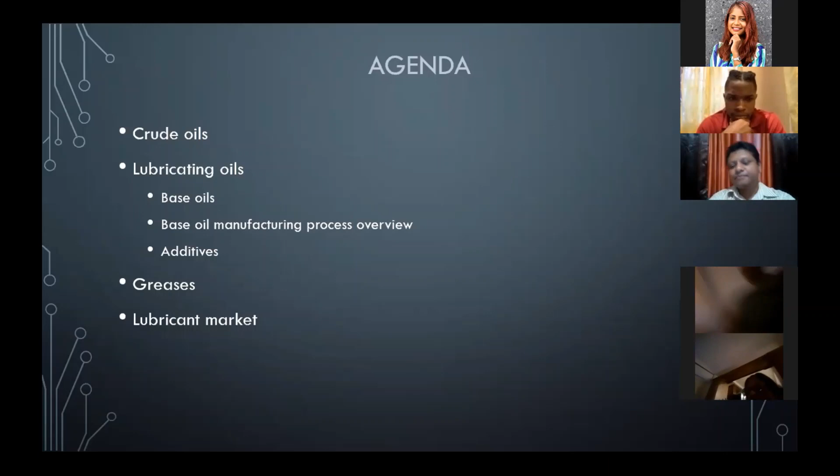So the agenda for today, you've seen the screen change. Crude oils would be crude oils. I'll talk about lubricating oils and its components, how the components are manufactured, specifically the base oil part of it. I'll talk a little bit about greases, application, specifications, and the lubricant market itself, just to give an idea and bring it all together in dollars and cents, which is what we are all about at the end of the day.

So lubricating oils. Normally when people talk about lubricating oils, they mean anything—it could be anything from baby oil to hydraulic oil to turbine oil to oil you could put on your dog. That's a general term for most people who are not familiar with the different types of oil. So it's really a generic term, and it really comprises base oil.

So there are two parts: base oils and additives. The most common lubricating oils are mineral type oils. So mineral type oils are one type of oil. We also have synthetic oils, and plant-based or bio-based oils—you would have heard about soya oil and rapeseed oil being used in equipment or some hydraulic equipment. This presentation, however, will focus on the petroleum-based or mineral-based lubricating oils.

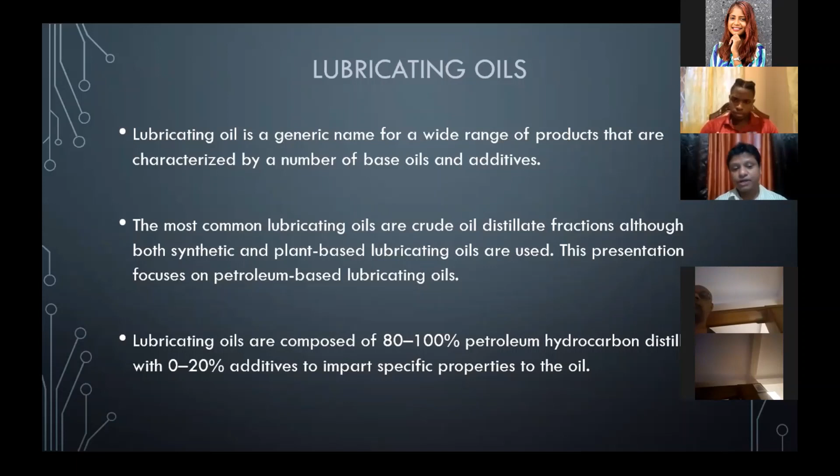These lubricating oils comprise anywhere from about 80% to 100% base oils, in different proportions depending on the type of oil. You have plain process oils, which are 100% base oils, and things like hydraulic oils, which have just about 0.5% additives. Then you have engine oils, which are anywhere from about 15 to 20% additives, and automatic transmission oils, which contain a lot more additives because they're very complex. So you have very simple lubricating oils going to complex lubricating oils.

So a little bit about the manufacture. Crude oils come from different parts of the world, and they have different characteristics and properties, and they classify differently. Basically, you have the paraffinic type, and you have the naphthenic type, or the aromatic type base oils, named after the predominant type of molecules.

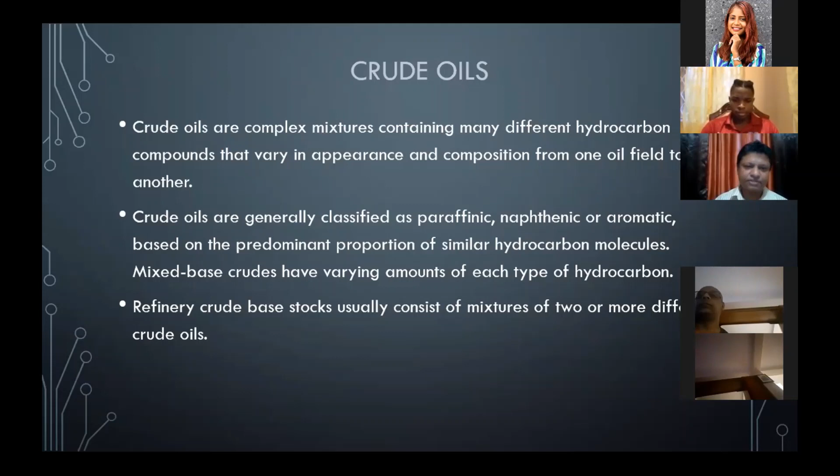So refinery crude base stock usually consists of a mixture of both, depending on the type of base oil they want. Most base oils used are paraffinic type, so refiners tend to purchase more paraffinic type crudes, or they have to mix the crude. Remember, they don't just manufacture lubricating oils, they manufacture fuels, which is the bread and butter of any refinery. The lubricating oils are an after step.

So with respect to base oils, there are a number of different base oils, and of course different qualities, different types, different manufacturers even of the same type, and they give different properties. The properties depend on the properties of the crude, especially for group 1 base oils, and a little less dependent as you start to hydrotreat and hydrocrack the base oils.

Just to give an overview, this is the API, the American Petroleum Institute publication 1509. It groups base oils because, as I said, it became very complex. For group 1 base oils, the saturates are less than 90%, the sulfur weight percent is more than 0.03%, and the viscosity index is anywhere from 80 to 119. The process uses solvent refined processes.

Group 2 base oils are more than 90% saturates, have less than 0.03% sulfur, and a viscosity index similar to group 1, so 80 to 119, and they are hydroprocessed, but lightly. Group 3 base oils are more than 90% saturates, less than 0.03% sulfur, however the viscosity index is more than 120.

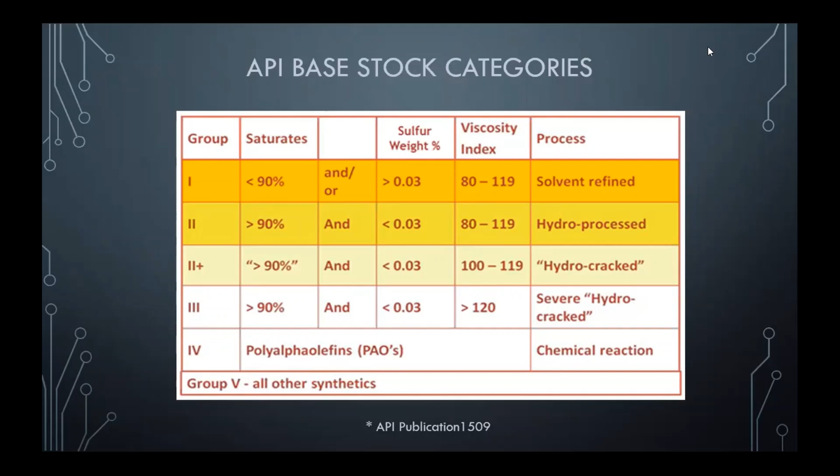Just to quickly give you an idea, we know what saturates and sulfur are. The viscosity index is the rate of change of viscosity of lubricating oils with temperature. So the higher the viscosity index, the less the viscosity changes with temperature, giving you a more steady viscosity throughout the temperature range in which the equipment works. That's the more useful thing to have, obviously, and it's all dependent on application.

To produce group 3 base oils requires severe hydrocracking. There's also a group 2+ category, for medium hydrocracked lubricants, so the quality is somewhere between group 2 and group 3.

Group 4 base oils are polyalpha olefins, created by a chemical reaction. Group 1 to 3 are based on mineral oil, produced from crudes, which is the focus of this seminar. Group 5 base oils are all the other synthetics, so you could have polyol esters, polyalkylene glycols, silicone oils - all those other things fall into that category.

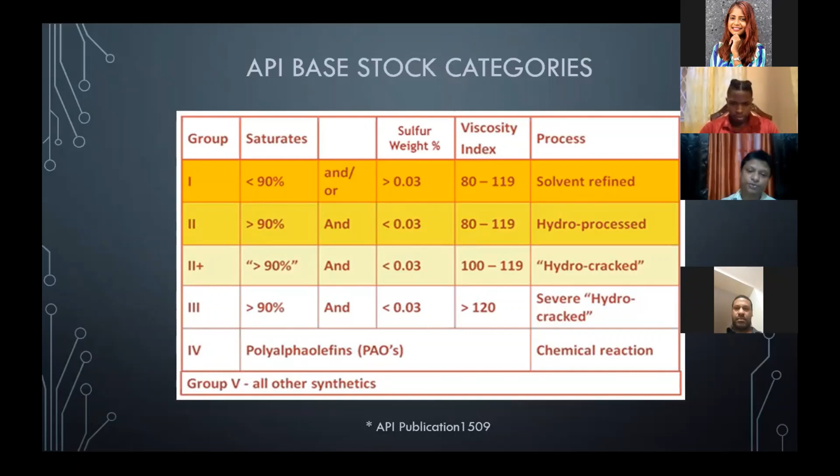So group 1, 2, and 3 base oils basically reflect the evolution of refining technology over the past 70 or 80 years. Group 4 base oils have existed for more than 50 years. They are pure chemicals created in a chemical plant. Group 1 to 3 base oils are produced using distillation and refining of crudes, whereas group 4 use components from the crudes and put them together in a chemical reaction to form the PAO molecules. So PAOs fall into a category of synthetic.

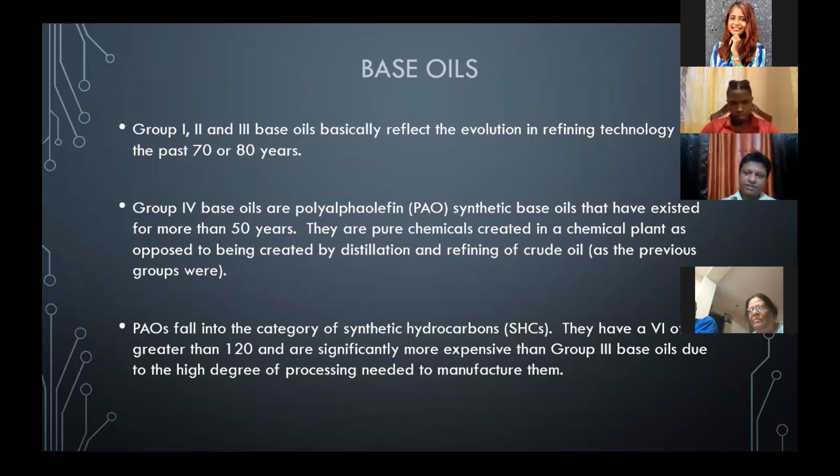They call them synthetic hydrocarbons, and they have a viscosity index greater than 120. They are, of course, a lot more expensive than group 3 base oils to produce because it needs a lot more processing to manufacture them.

So a little bit about the base oil quality.

More than 80% of any lubricating oil is base oil, so the base oil has a great influence on the lubricating oil. Some of the things affected are viscometrics, viscosity grades - lighter lubricating oils need lighter base oils, and heavier viscosities need heavier base oils.

Appearance is important - color, cleanliness, clarity. Take sewing machine oil, for instance, in industrial sewing machines where lubricating oils are used in the equipment. If there's a spill, the oil can get on clothes and discolor them, causing loss of product. So those oils tend to be very clear and light so they don't soil the clothes excessively. Clarity also matters for some applications where you need the lubricant to be clear enough to see through.

Volatility plays a part, volatility and safety. This is the property of the oil where, especially when heated, the lighter ends come off because of different molecule sizes. This affects your flash point and things like your distillation, so you might have more of the heavy ends remaining. If your lighter ends go off, you end up with a thicker base oil or lubricating oil, and that changes your viscosity, which can damage the equipment.

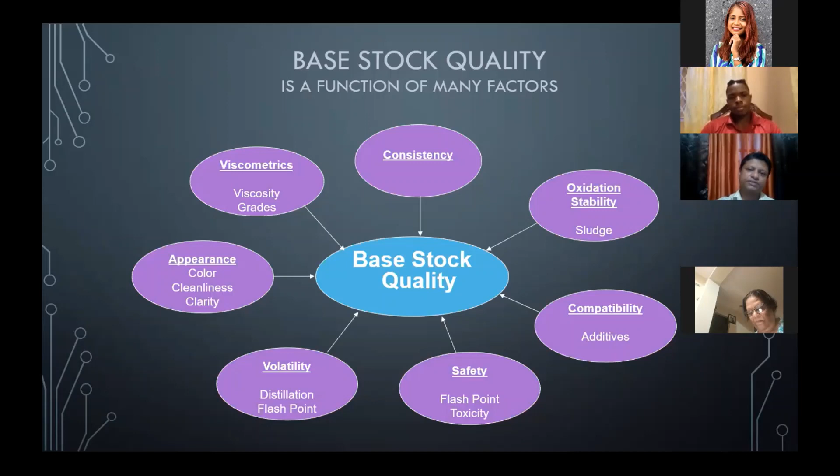Any questions so far? Anybody awake? Everybody awake so far? Yes, we are awake. Okay, excellent. Feel free to ask any questions if I'm going a little bit fast. You have any questions so far, though? Nope. Take that as a no. We have a question.

Synthetic oil or bio oils - will they replace extracted oil in the near future?

Good question, I'll talk about that a little bit later on. Let me just finish this, and if I forget when I come to the end, remind me, because I have a part addressing bio-based oils near the end. But just to give a general answer - not in the immediate future, because bio-based oils don't have a lot of oxidation stability, so they tend to oxidize faster. You find them more used in hydraulic type equipment where the temperature doesn't rise above 40 degrees Celsius, not in engine oils at hotter temperatures or turbine oils. And of course you always have the same argument as with biofuels - it's either food or fuel, because you use food to make the alcohols which you burn as fuel. So there's always that little argument there. But good question.

The manufacture of Group 1 base oil. Just to give a little overview, you preheat the crude oil and then send it through the fractionating column. At the top you have the gases - natural gas, propanes, butanes, which are the LPG. Then you have some gasoline types or naphtha types coming off. Then you have the different streams - kerosene and diesels, or the streams used to make kerosene, diesel, and of course fuel oils. This is very simple, very simplistic.

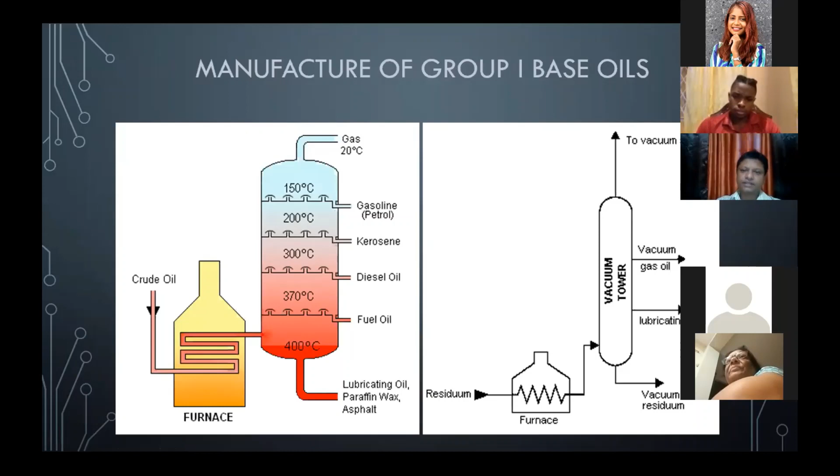So in a nutshell, this is basically the group 1 base oil manufacture. For group 1 base oils you have solvent refining, so the separation processes are solvent based. The solvents remove the aromatics and the solvents remove the waxes, and it may include a light hydrofinishing at the end, and that's basically how you produce group 1 base oils.

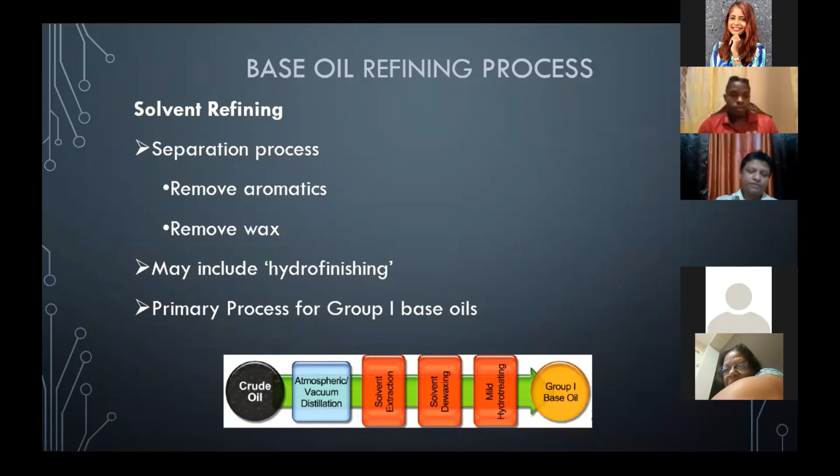And of course, these were the first types of base oils to be used.

The hydroprocessed route is for group 2 and group 3 base oils, and the difference between group 2 and group 3 is the severity of the hydrocracking or the hydrotreating. This is where you have molecular conversion - hydrocracking, catalytic dewaxing, and hydroisomerization, all things you can find on the internet. This produces the group 2 and group 3 base oils.

The difference here is, basically what you do is take a group 1 base oil and improve on it to form the group 2 and group 3 base oils.

To give an idea of how the market works, when there was a switch - there were a lot more group 1 base oil plants around the world, and we got a lot of supplies from America. Our major suppliers from America, with their emission controls, the older plants were group 1 plants and the newer plants were group 2 plants.

Somewhere around 2007, they had a switch in the market, and it was an odd thing where group 2 base oils were actually cheaper, better quality, and more expensive to produce, but they were actually cheaper in the market than group 1 base oils. It was based on demand, because all the manufacturers were using group 1 base oils at the time.

All the additives they had were designed to use with group 1 base oils, so they needed to switch. For about a period of a year, group 1 base oils, which were lower quality, were actually selling more expensive than group 2 base oil.

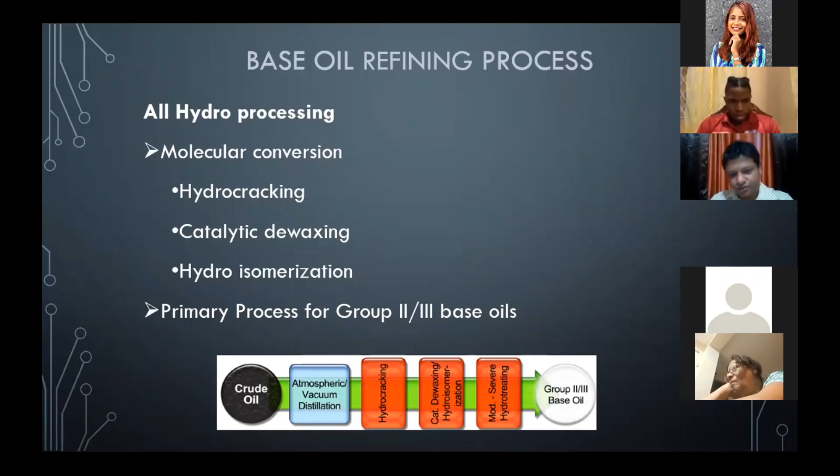So for the same viscosity oil - and I'll share my experience at NP of how much people pay attention to color even in the industry - when we switched from group 1 to group 2 base oils, when we were blending the heavier viscosity oils, you have lighter oils like an ISO grade hydraulic 32 or a gear oil 32, 46, or 68, and then higher gear oil viscosities like the 460 and even the 100 or 150s.

So the group 2 base oils have a lot better, and the group 3 base oils have a lot better oxidation stability because of the severe hydrocracking. It would have knocked out or broken up the naphthenic type molecules or the aromatics and created more paraffinic type molecules, which are more oxidatively stable and can be used at higher temperatures for longer periods of time.

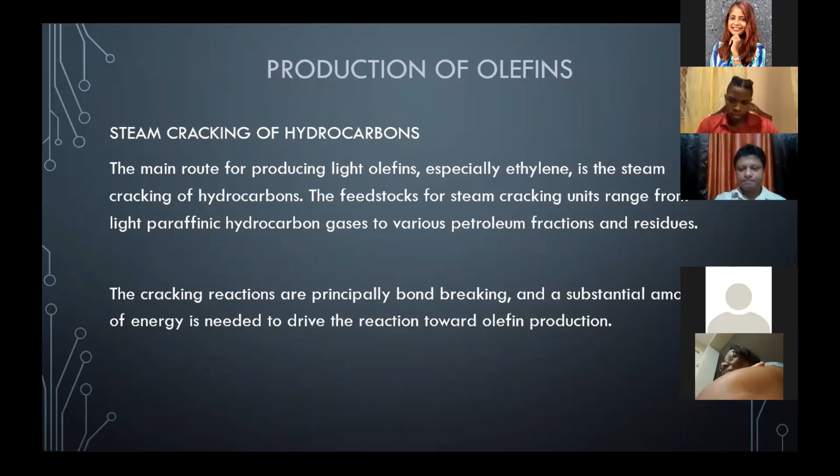The main route for producing light olefins is steam cracking of hydrocarbons. The feedstock comes from the refineries, so crudes and light ends, and it also comes from the natural gas field. So the raw materials for polyalpha olefins really come from the refinery - ethanes, propanes, butanes, naphthas (similar to gasolines), and gas oils (like diesels). That's basically what determines how heavy or large the molecules are.

You may have heard an ad where a particular oil company was advertising that they were using natural gas to produce their lubricating oils. This is the natural gas process they were talking about, to produce polyalpha olefins from natural gas feed. Obviously this is very energy intensive and expensive to make, so even though they advertise it, it's not a high quantity, and it's not manufactured in large quantities anyway.

So what they do is mix some of this into the lubricating oil and continue using the group 2s and group 3 base oils. It's not totally that, but once you understand the process - basically you have the different crackers, the production units where you put the molecule chains back together. This product here is not the lubricant; this product is the base oil, the polyalpha olefin.

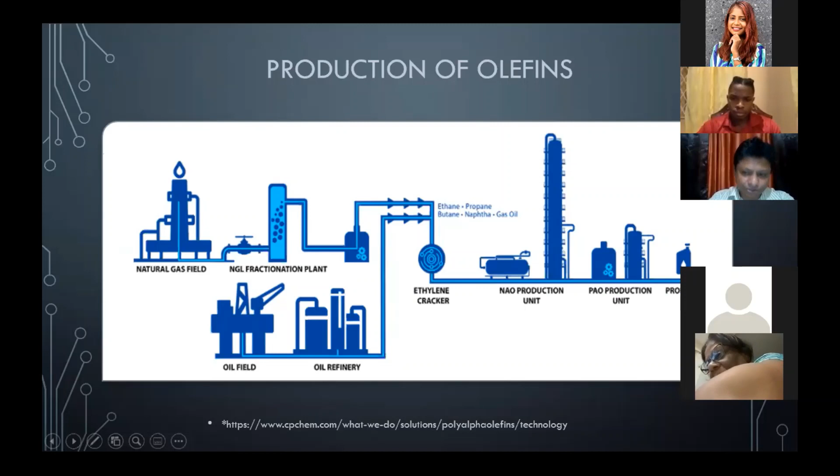Why I included this slide is so that when you have a manufacturing plant, it's like not putting all your eggs in one basket. If you have more than one market for your product, it mitigates your risk - if there's a downturn in the industry you're supplying to, it doesn't affect your business as much. It's like when you invest in the stock market, you split your portfolio into some low risk, some medium risk, some high risk, so depending on how things go, you hedge your bets.

So the predominant use of polyalpha olefins is as synthetic base stocks, and in addition they make surfactants, which are used for making aqueous detergent formulations.

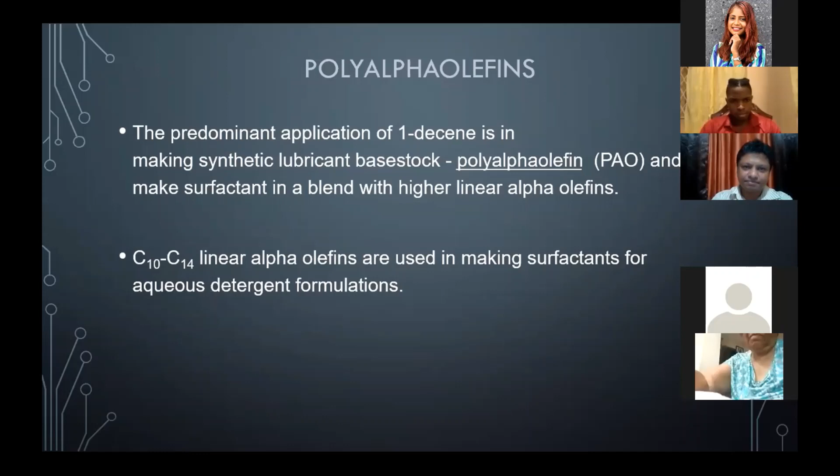A little bit of history of the PAOs - I included this slide because, since you are university students, I wanted to show that everything would have started with a small process moving forward, starting with experimentation. You tend to hear most times that you need to go to school, get a job, get a good job, then retire. But more and more now we're realizing it's like go to school, maybe start a business and take it from there.

Just to give an idea, the technology you see now really began years and years ago. PAOs were originally developed in 1930, and the first commercial use in engine oils was in the 1970s.

It's made from ethylene gas, which is crude oil or natural gas dependent. It has a higher temperature resistance than mineral type oils. Polyalpha olefins can be used up to approximately 160 degrees Celsius continuous service, and intermittently different parts of the unit could go up to 270 degrees Celsius. To give you an idea, the engine in your vehicle typically runs at a little less than 100 degrees Celsius, so 160 degrees Celsius is a pretty high temperature.

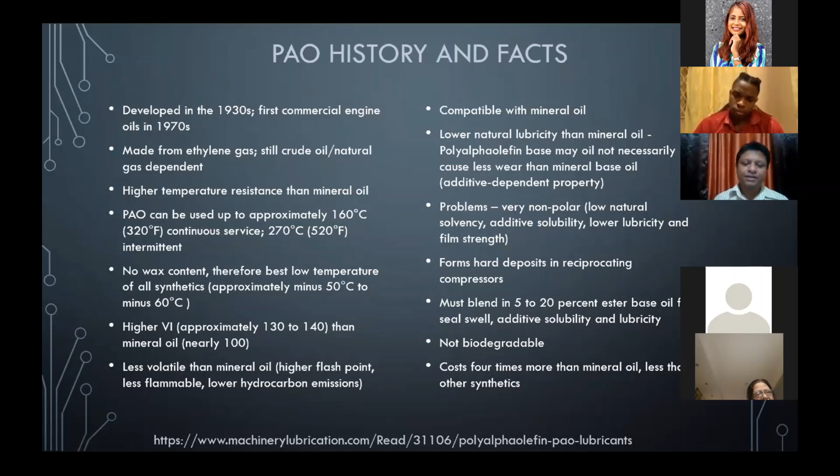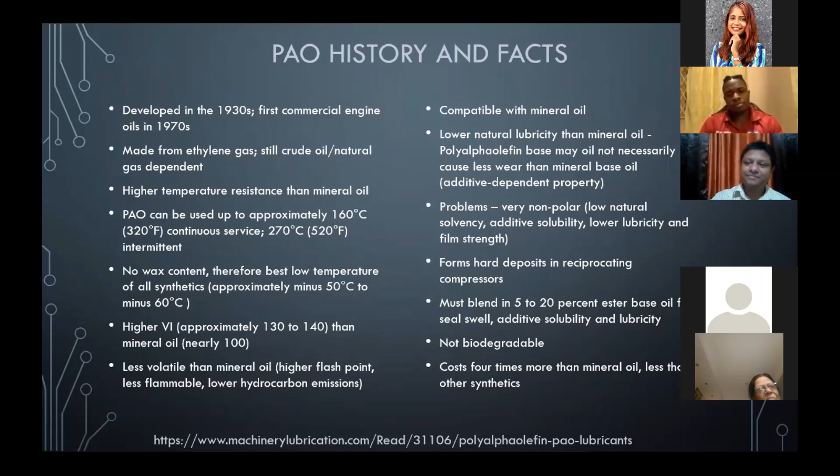So it took a while for the Europeans to change, but eventually everybody kind of switched to the group 3 base oils, because for the average user, using a PAO or using a group 3, I can't tell the difference, right, once I follow the oil change intervals and that kind of thing.

Any questions so far? Because that was base oils. So I have a question. You mentioned that it's not recommended to do an engine flush, right? Is it that the engine flush gets rid of the residual oil and that could cause a problem with your gears, or?

A good question. The reason why we don't recommend engine flushes is because the engine is complex equipment. You have high pressures, you have metals rubbing against metals. Even the pistons - sometimes you have metal to metal contact because the pistons go from top dead center to bottom dead center, right? So the pistons move like this.

Now to create the hydrodynamic wedge, you have the rings, and the rings move, because they're free to move between the piston and the cylinder. So it needs motion. It's similar to hydroplaning on the highway. If you drive slow enough, your tire would be in contact with the pitch. However, if you go fast enough, you'll get hydroplaning, where you get the hydrodynamic wedge between the road and the rubber, and so the road and the rubber never meet. That's the hydrodynamic lubrication.

So when this piston is moving top to bottom, at the middle you have a lot of motion, but when it reaches the top, it has to stop and come back down, so the velocity reaches zero. So you actually have metal to metal contact. And you have your bearings - remember, your bearings need a certain viscosity.

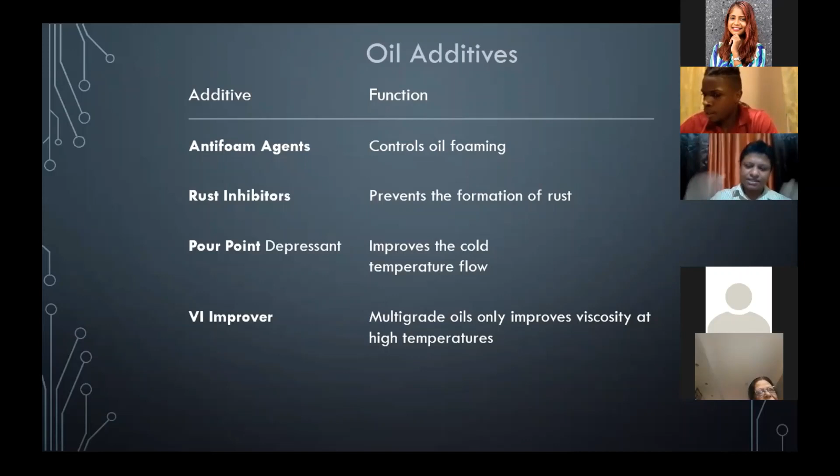Viscosity index improvers, or the multi-grade oils, improve viscosity. It maintains the viscosity, so there's less change in viscosity over a wider range of temperatures.

The interesting thing here too is that some of the additives actually work against each other. So you have detergents that try to clean metal surfaces, and then you have anti-wear agents. The most widely used is zinc dialkyl dithiophosphate, and these tend to attach onto metal surfaces. So you have directly two additives working against each other.

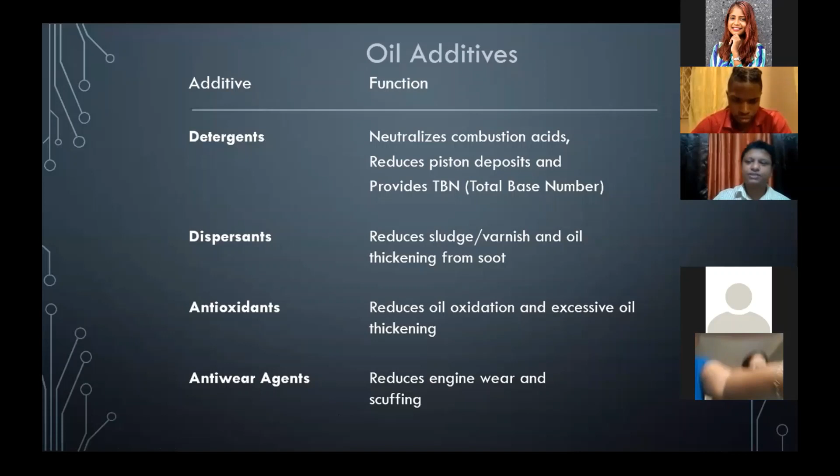So that's why when you develop the formulations, it's a very tight balance.

To give you an idea of the business, there are 4 main additive suppliers, and they were formed from the multinationals. Before, every multinational had their own research and development, they developed their own additives, but it's very expensive and costly to develop. So they formed these companies, they partnered and formed these 4 companies, combining in different ways inside it. And these companies sell additives to the different manufacturers.

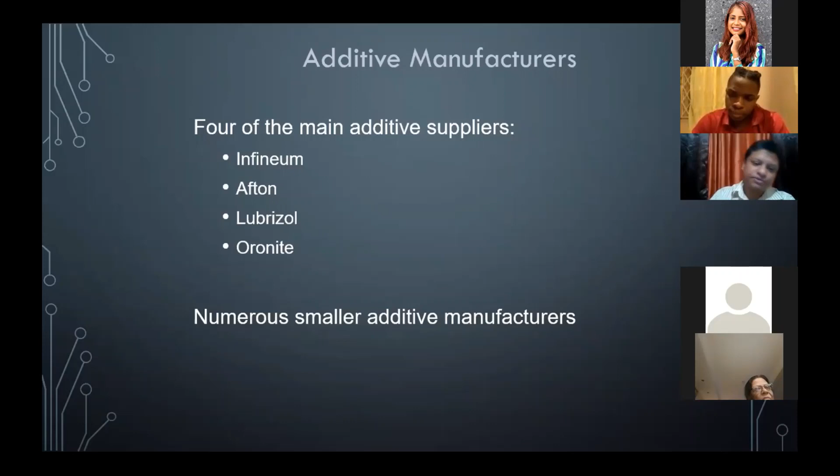So NP would be buying from these brand name manufacturers. And of course, there are numerous smaller additive manufacturers worldwide.

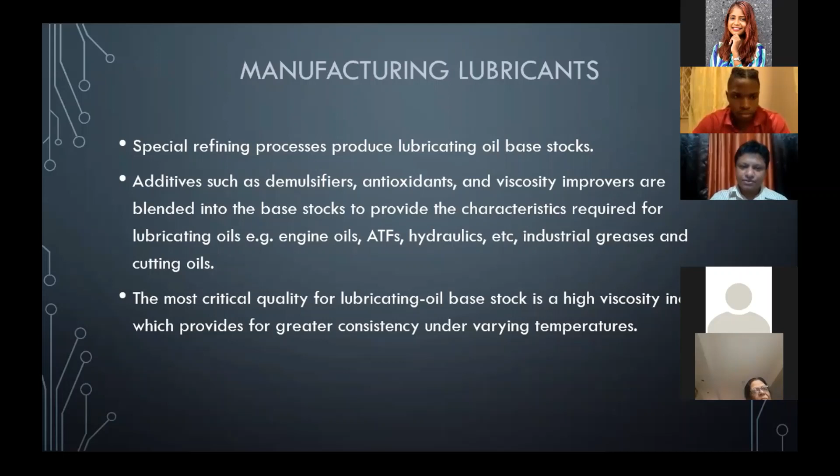So the manufacturing of lubricants. I spoke about the crudes a little bit, and we spoke about the different types of base oils coming from the petroleum base. We also spoke a little bit about the additives. So you have the different additives, they combine them with the base stocks, and of course they form the different lubricating oils - engine oils, transmission oils, hydraulics, greases, cutting oils.

The base oils that you import and put into your tank farm are checked. You check the quality before it comes in, because you know exactly what the viscosity is. You check the quality of the additives because they come with a material safety data sheet to ensure they have all the additives. It goes into blending tanks. After it's blended, you do a quality check to make sure that it meets the specification of the actual lubricant. If it doesn't pass the test, it goes back to the blending tank and is corrected.

Once it passes the quality check, it goes to holding tanks and then goes to filling. Normally the first container to be filled, whether it's a drum or 1 liter quart, it is checked for quality. Just after blending, it might just go into a holding tank - so you might have it there overnight and then fill it the next day. So you want to make sure the right product goes into the right labeled container.

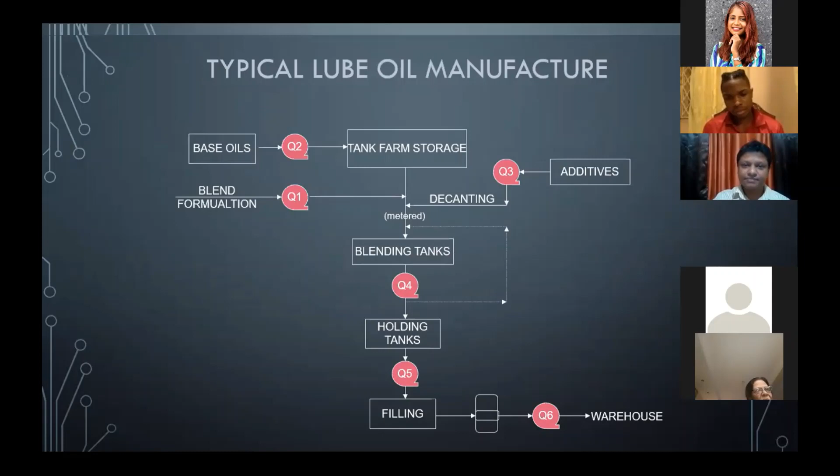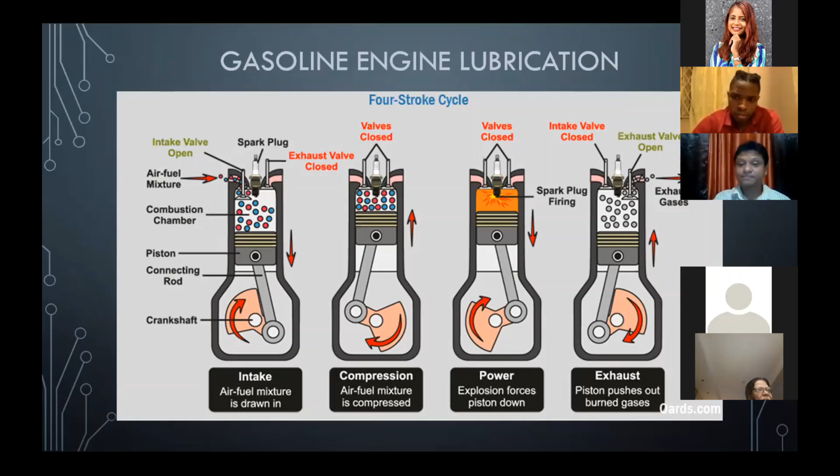You have sliding type friction where surfaces are rubbing against each other. You have rolling type friction where the cam follower is - that allows the valves to lift, and that's metal to metal contact. Sometimes you might have bearings inside there, so you need roller bearings, you might have ball bearings. So there are a host of different things that go inside there.

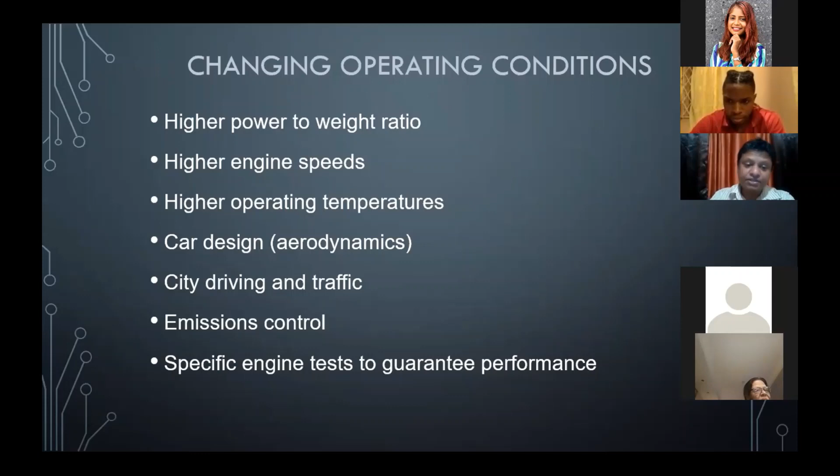The car designs are changing, they're becoming more aerodynamic, so that means less air is flowing over the engine to cool it, and more air flows around the engine. You have a lot more city or traffic driving, that is harsh driving conditions. You have emission controls, and of course you have specific engine tests to guarantee performance.

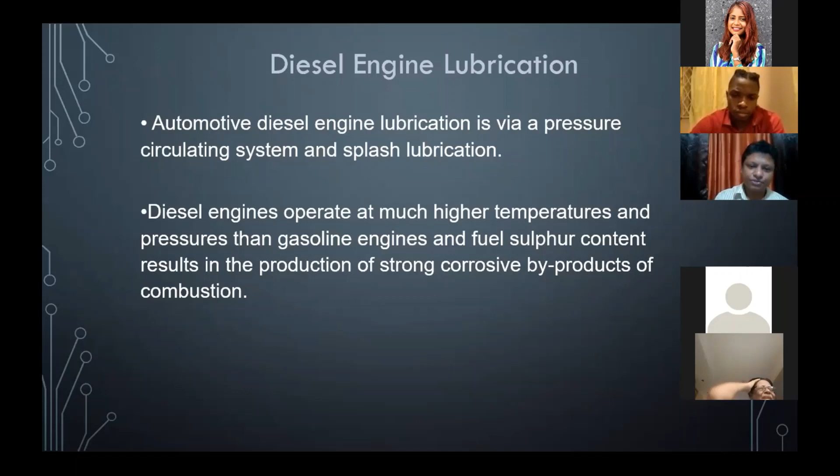On the diesel side, you have the diesel engines. Diesel engines are similar to gasoline engines, except they operate at higher pressures and temperatures. In addition to that, especially if you're not using ultra low sulfur, the sulfur levels are a bit higher - that forms sulfur dioxide, which when it dissolves with water forms sulfuric acid. So the oils need to be a lot more robust than gasoline engine oils.

Automatic transmission fluids - everybody has a car and is interested in these - are actually the most complex types of lubricants because they have the most amount of additives. You have different types of things in there: the torque converter, the different gear trains, the clutch pack, a hydraulic system that has to be able to cool. You really need to ensure that, and of course you have different makes too - you have the double clutch system, and the CVT type transmissions.

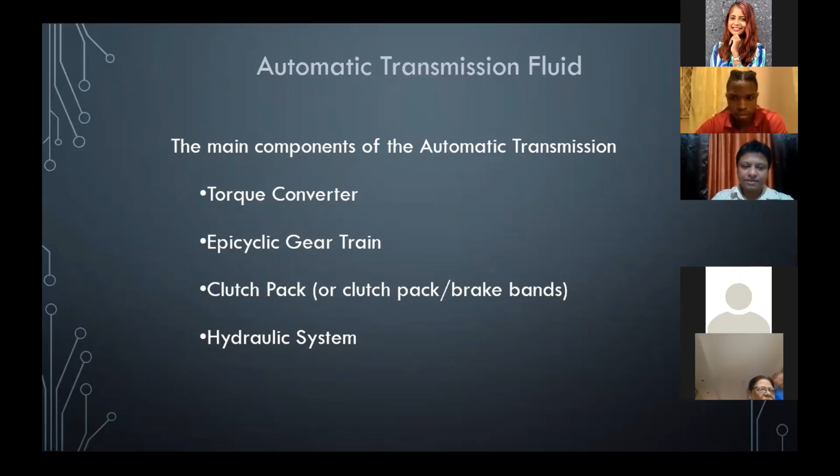So it takes into consideration friction performance. Of course, when you change a gear into drive, you don't want to get a jerk, or you switch it into drive and it takes a while to engage. You want it nice and smooth, you want the gears to change nice and smooth. You want efficient power transmission, good gear lubrication, and it has to be able to transfer heat, so to cool. It has to have high oxidation resistance because nobody changes their automatic transmission fluid.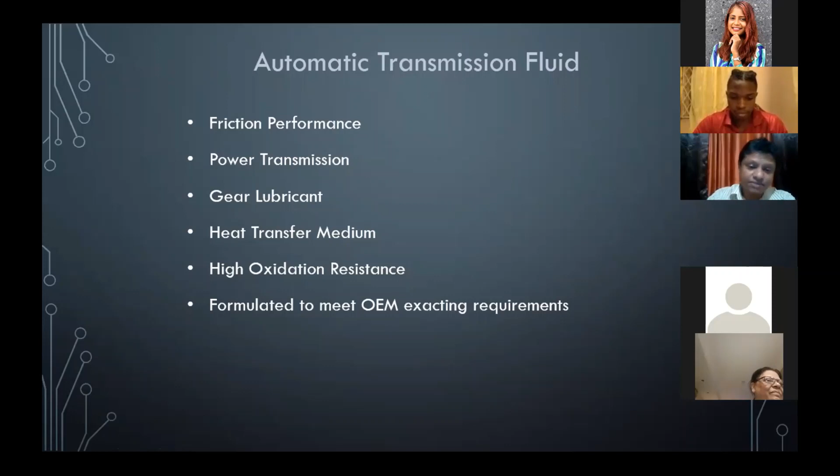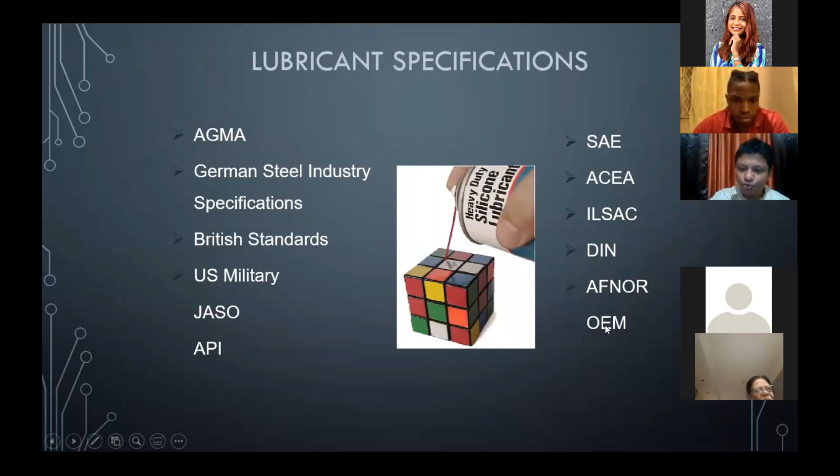And of course, you should be following your manufacturer's specifications. So when you manufacture, you normally manufacture to a specification. There are a host of different specifications. You have the German Steel, you have AGMA, which is the American Gear Manufacturers Association, US Military, you have the American Petroleum Institute, JASO is the Japanese spec, ACEA is the European spec. And of course, you have a host of different OEM specifications. So it depends on where you're blending and what it is you're blending.

So lubricating oils are one. I'll touch on grease a little bit. A grease really is a solid to semi-solid dispersion of a thickening agent in a liquid lubricant. Basically, what it means is that there's a matrix and you put the oil inside the matrix. So it's like a sponge, grease is like a sponge with oil soaked into it. And when it needs lubricating, when there's pressure, the oil releases, it lubricates, and then it goes back into the matrix. That's basically how grease operates.

These are the different grease numbers. It runs from a 000 to a number 6 grease. And of course, the lower the penetration - so a cone drops into the grease at this temperature - and of course, the stiffer it is, the higher the number.

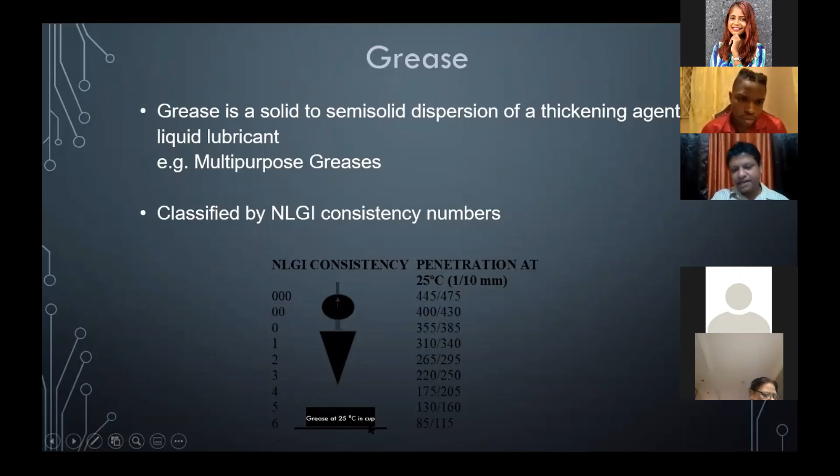A little bit about the grease manufacturing process. NP has a grease manufacturing plant. They use the saponification reaction. So we use a fatty acid, hydrogenated castor wax, or sometimes 12-hydroxystearic acid, and it reacts with an alkali, and that's why you get different grease types depending on the metal in the alkali. So lithium hydroxide reacting with the hydrogenated castor wax will form a lithium type grease. And then, of course, calcium will form the calcium type grease, the potassium type grease. Once you cook it in the kettle, once it comes up to temperature and the saponification reaction finishes, the lubricating oil is added, it's quenched, and it's absorbed into the matrix.

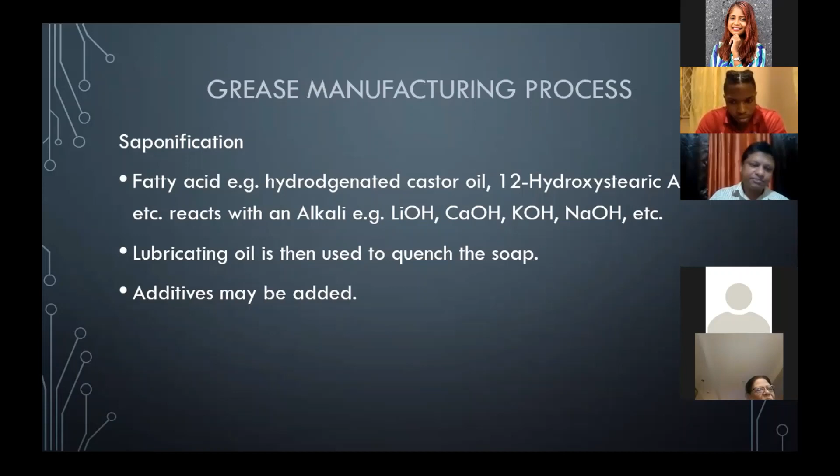And then after that, you have milling and some different processes, and then you put in the additives. So the greases, as I say, it depends on the method of lubrication. You consider things like operating temperature, penetration range, of course the stiffness of the grease - how thin or thick you want it - depending on the speed of the equipment. The higher the speed, the thinner the lubricant you use, loads and any other special factors.

In addition to that, why do you want to use grease? You typically find it for your wheel bearings, because they're in dusty and dirty environments. You tend to use grease because even if you have any ingress of dust or dirt particles that get past the seal, it would stick right on the grease on the outside and prevent it from getting inside the bearing and causing damage. That's really the purpose of the grease.

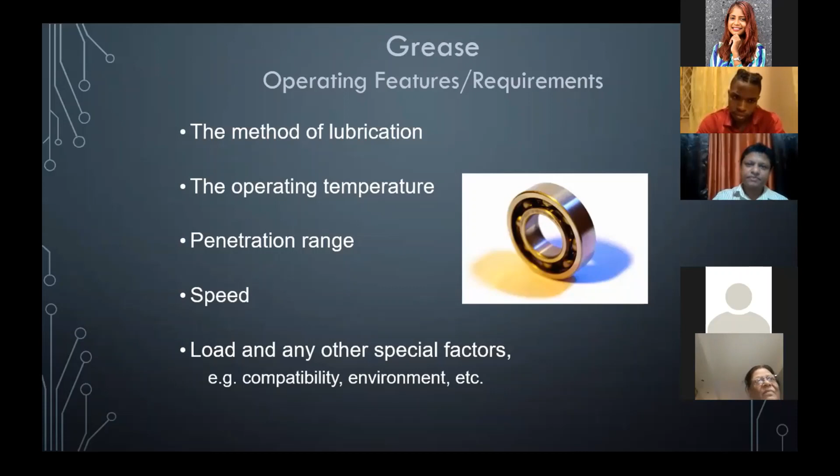So I think I'm doing okay with time. Coming to the end of the presentation.

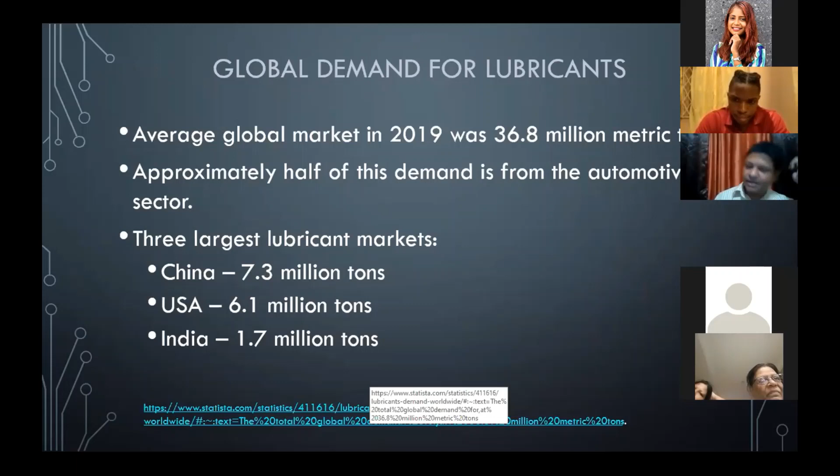So the global market, I decided to touch a little bit on. The global demand for lubricants in 2019 was about 37 million metric tons. More than half of that, about 57%, is for the automotive sector - the engine oils, the transmission oils and those things. The three largest lubricant markets are China, USA, and India. So you get an idea of what the market looks like.

With respect to threats to the petroleum-based lubricant, and this is where you were asking about the bio-based lubricants - so longer oil drain intervals. First of all, lubricants have longer oil drain intervals due to better quality lubricants and better quality fuels. So even for diesel engines, you have ultra low sulfur - you used to have a lot of sulfur, which forms acids and forms a lot more combustion particles that could damage bearings. So you could run the oil inside there for a lot longer. And remember, we spoke about the quality of base oil.

So once it's more oxidatively stable, they can last longer inside the engine. You have the increasing use of bio-based lubricants in the industrial sector, typically because they operate at a lower temperature than the engines.

And of course, these are driven by environmental laws in the US and Europe relating to degradation. This same law is a restraining factor for synthetic lubricants, the polyalpha olefins I was talking about, which are not biodegradable.

You have the advent of electric vehicles, and from the way things look, you see European countries saying they're going to ban internal combustion engines past 2030 and 2040. The French, and I think the English, made certain statements like that, so you find Europe heading that way. If that happens, the demand for lubricants, based on the values I gave before, is going to reduce.

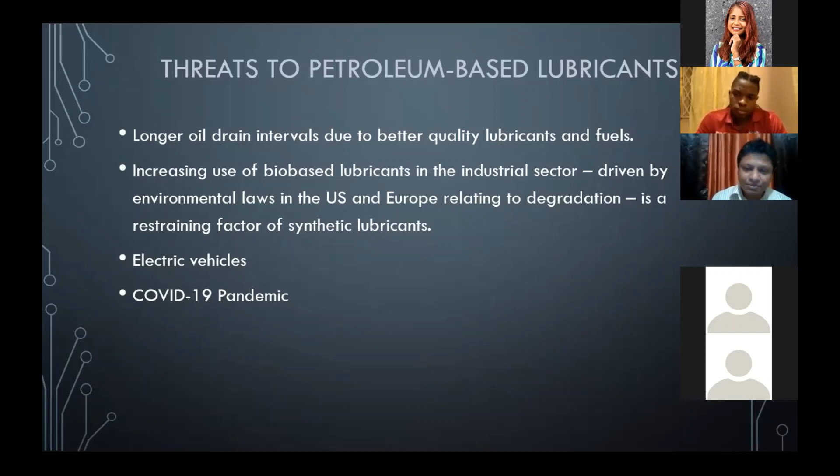So I think I did, and that's the end of my presentation.